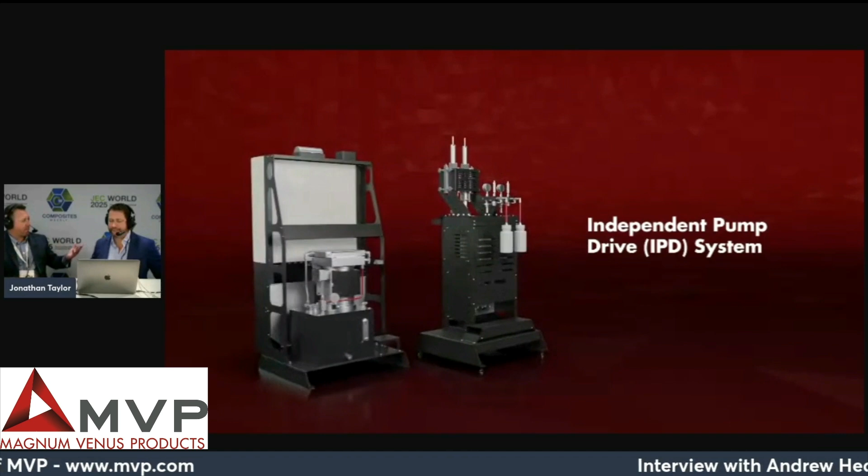And that's why we kind of rebranded them. It used to be called AED. We made it MVP Motion now, because everything that moves is going to be driven by PLC or motion axes to help develop or produce a new part. So that's from filament winding to robotics that we're going to be working with Lesta on, to even the independent drive system. As you see there, it's a PLC-driven system for precision and the data acquisition behind that and all that stuff too. So that is good.

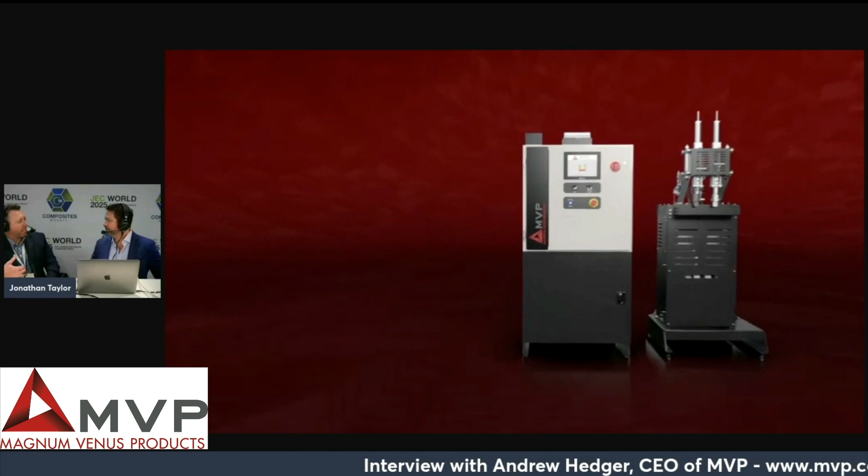Tell me a little more about this. So it became more material-based. A lot of people come to us, hey, can you pump these materials, the higher-end materials like your phenolics, your urethanes, your epoxies, stuff like that. And we're like, okay, we need a system that is almost pulseless.

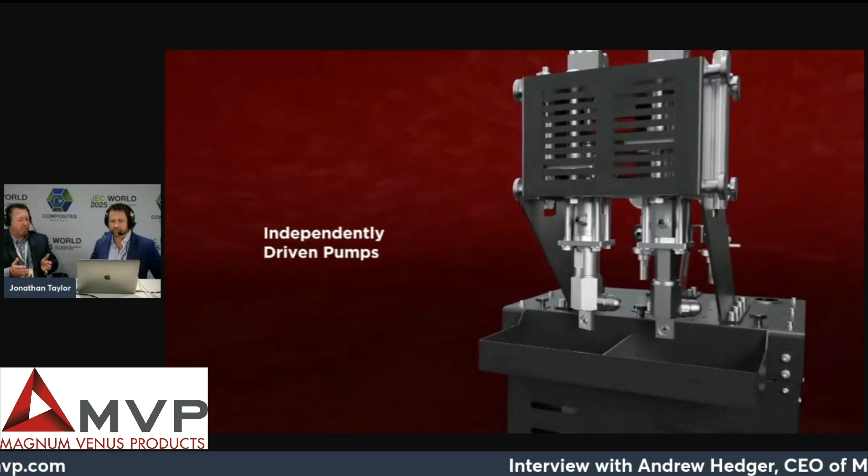So when I say pulseless, when you have an air-driven system, you'll get a variance to where, hey, every changeover, you'll see a little bit of cushion like that, right? So this thing is actually electrically driven, PLC operated. We have a little bit of air to it too, but it's all about precision of shot sizes.

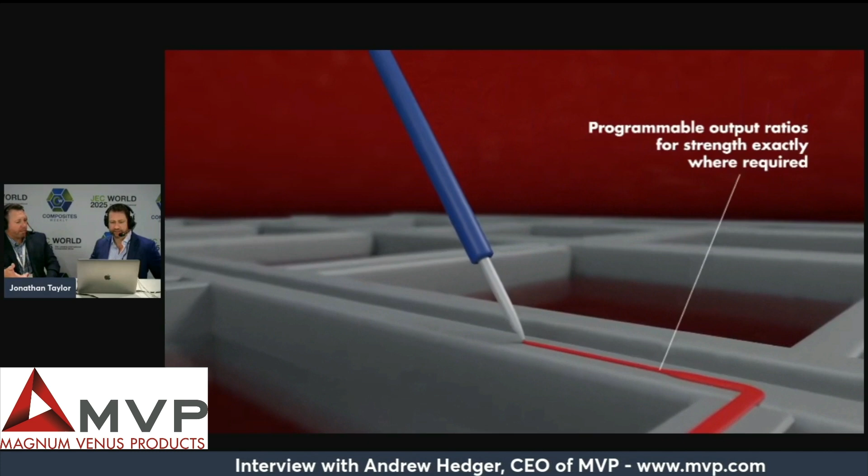Think about electrical components, stuff like that, potting, battery encapsulation. This is meant to do that, and it's meant to deliver exactly what shot size you need, what material you need, temperature, all that stuff. And all you got to do is basically hit a couple buttons and it runs away.

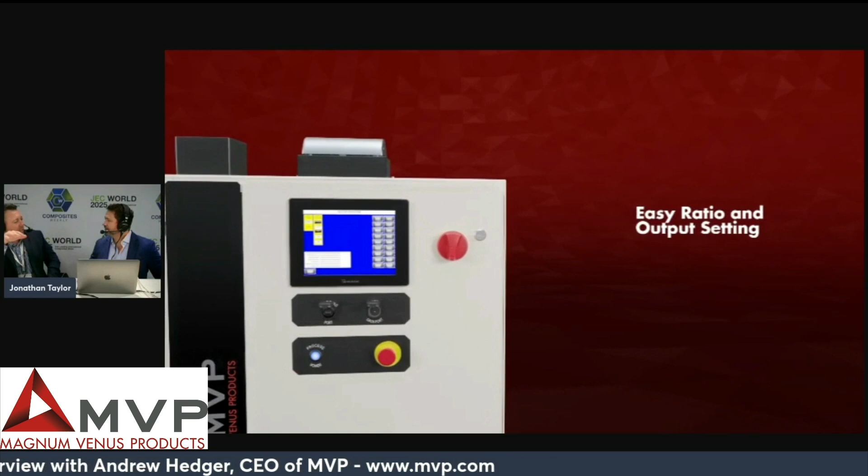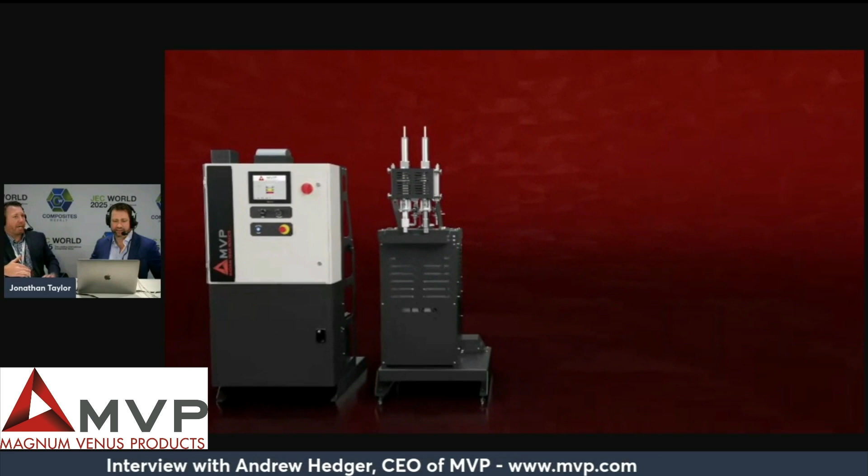But the thing that's cool is you'll see in that video in the background it shows 2 pumps. We have opportunities to go up to 6 different pumps on this machine and mix 6 different materials at once. So it could do 1 pump, 2 pumps, 3, 4, 5, 6, and the volumes could change dramatically too. So it's not only low volume and low dosage, it could be high volume, high dosage, and it could also be heated to the temperature you need.

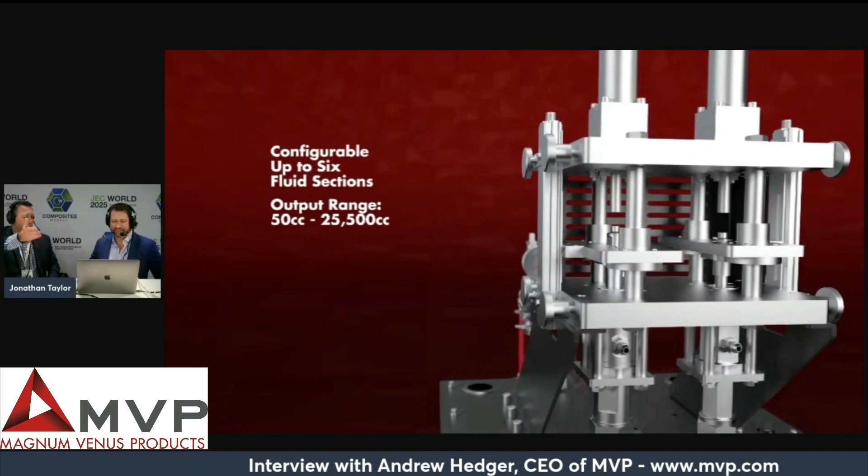It's pretty interesting because that's what we call independent drive. Every pump is being independently driven. So say you want this ratio, I want it to be 50 to 1. You can perfectly control that. So that is amazing, and this has been in the works.

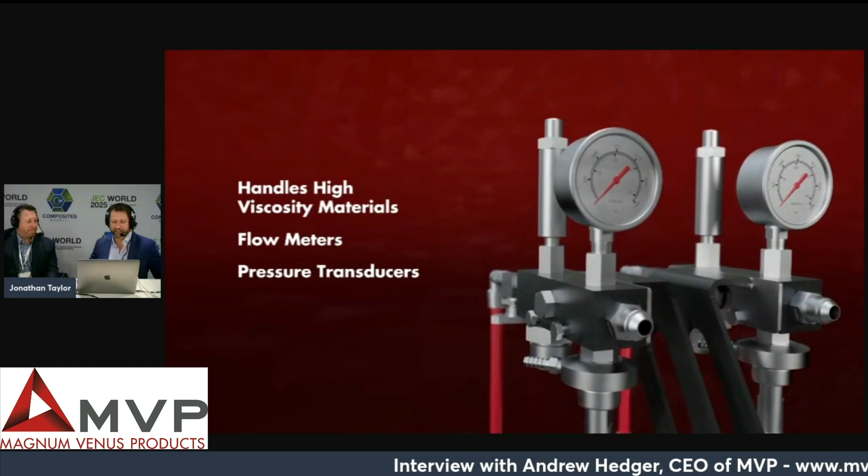I mean, you guys are just featuring this now. We've been working on developing it the last couple of years. We brought it to JEC last year as just a soft kind of launch. This year it's a full-blown launch.

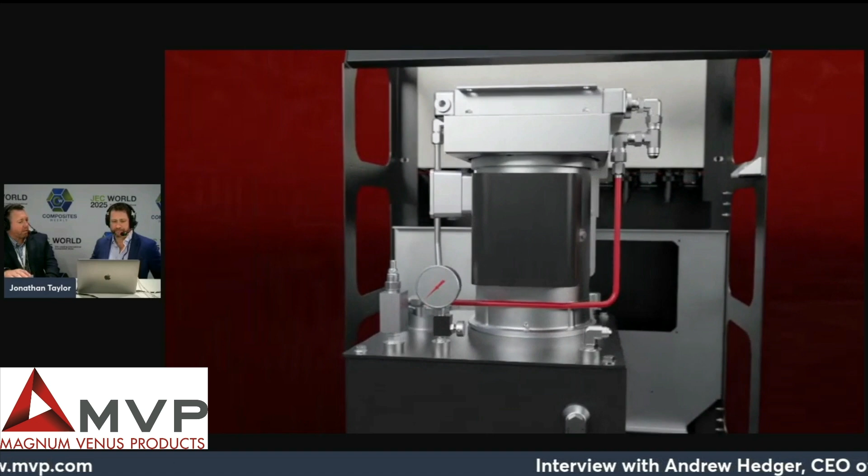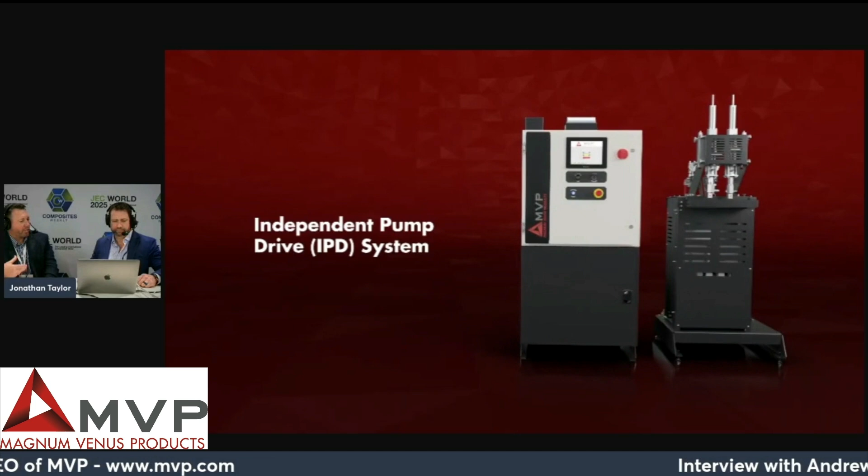We're actually going to be mixing runners through it later on today in our booth. But we have it dialed in now because we had to get some engineers on it, figure out the programming, understand the materials we want to actually deposit out of this machine. So it's been an official launch now, and it came at perfect timing because that's the first one we made in the gray and the red for the rebranding. We thought, this looks so cool, let's do it to the rest of our equipment now too.

So where are you field testing specifics? We're looking at a couple pultrusion companies right now, and a couple places in the aerospace industry. We have some customers there looking at doing some stuff. It's unique materials they're using. One's a phenolic resin we're messing around with, and the other, I can't really share the materials, but it's more of an epoxy-based system in the aerospace industry. They're testing them out in their labs, and we're getting great results on that.

That's great. We've had this actually connected to our 3D printer in the past, so it's a machine that will go on a 3D printer too, to deposit materials. So when you talk about thick stuff like peanut butter to really thin stuff, it pumps both, just depending on how you transfer feed into the pumps. From one end of the viscosity to the other, water or peanut butter, what do you want?

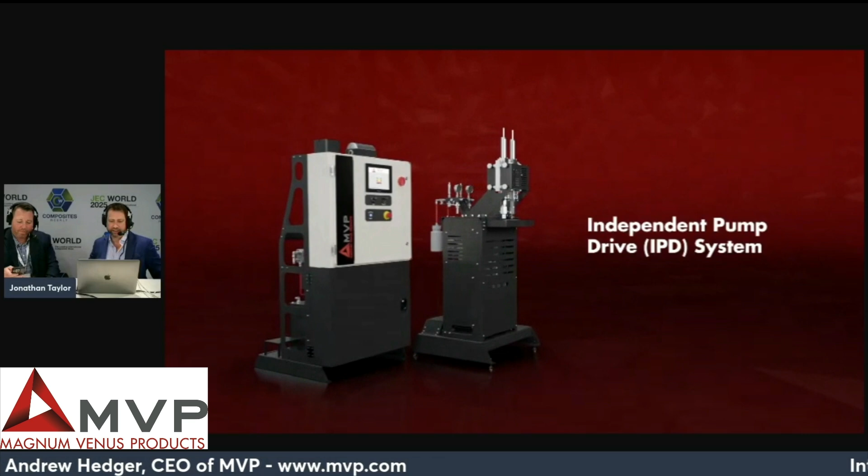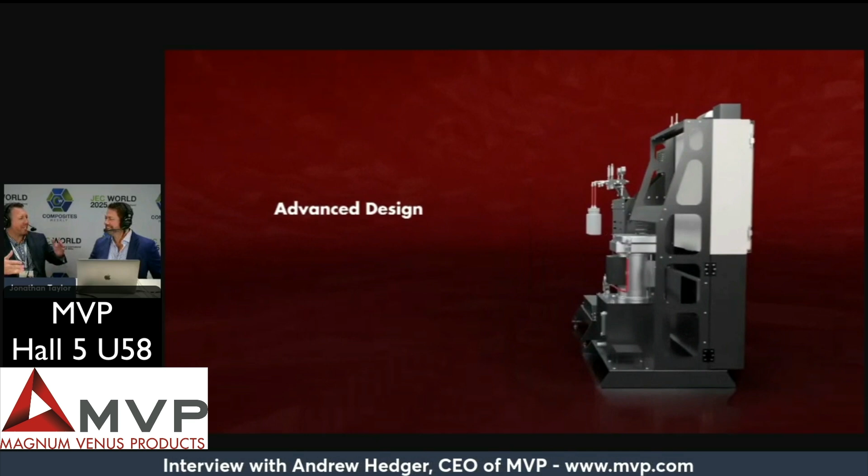Also, you told me you got a drink machine over there. Yeah, that's what the demo drives are going to be doing. So at 3 o'clock, we're going to be making runners, and it's going to show how you can do, hey, what ratios do you want, and being able to change them on the fly. So you guys will have a line of people at that booth. There'll be a limit, we need people to not block out the booth still.

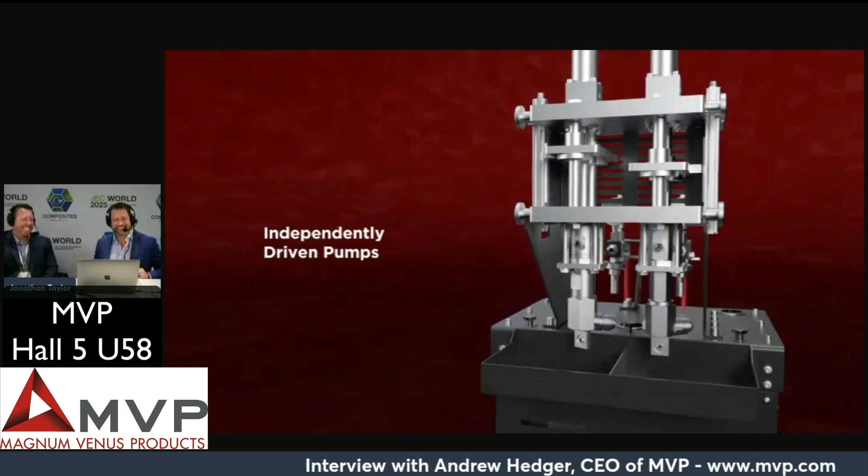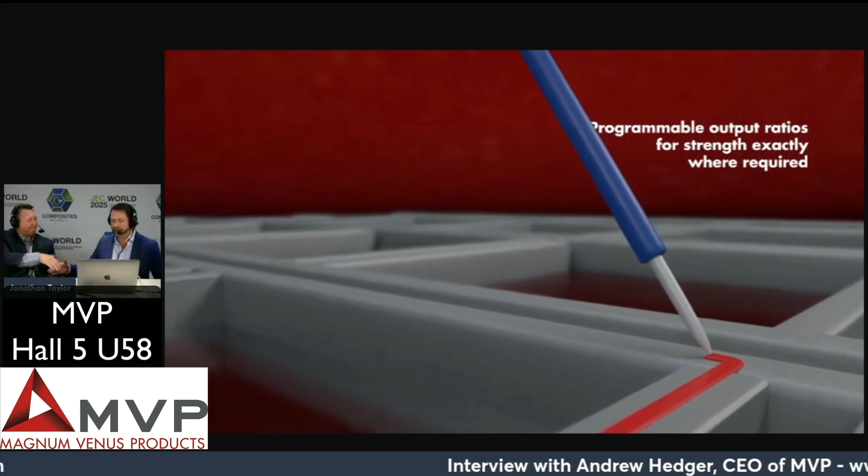All right guys, yeah, there's more applications to this. Okay, we need to move on, you've had your shot, okay. Exactly. No Andrew, it's always a pleasure man. Yeah, thanks for stopping by. Congratulations, appreciate it, and best of success on this new technology.

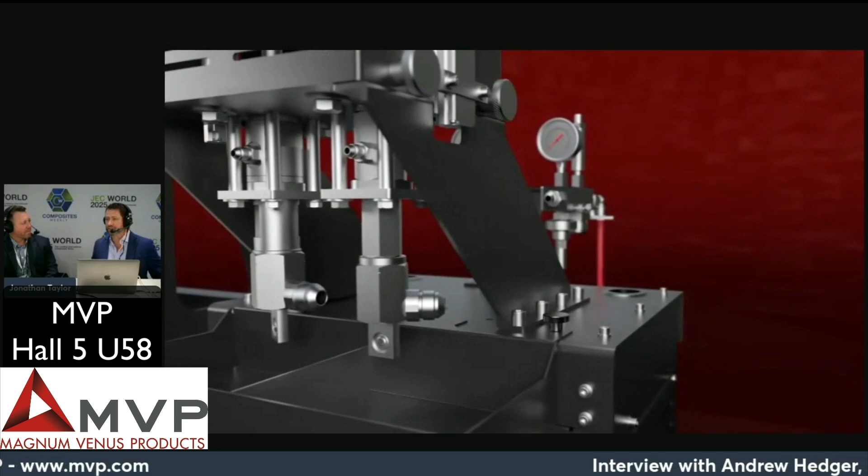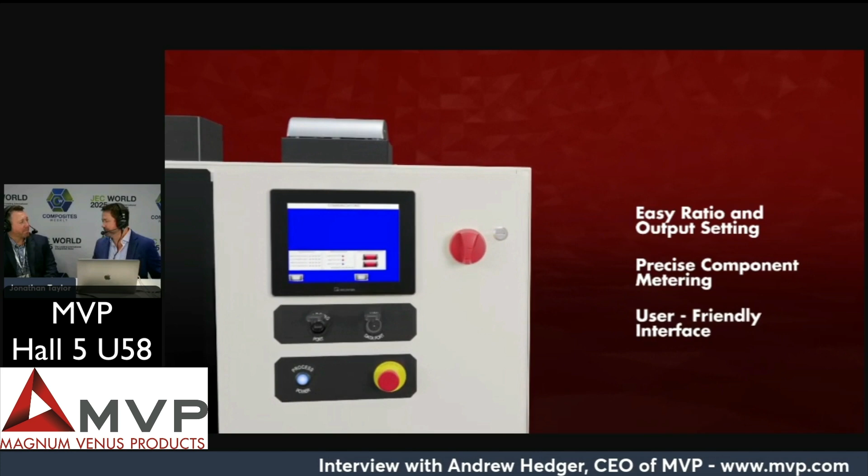And again, with Lesta too, talking with Derek, I think there's still a ton of interest out in the market now for, you look at finding skilled workers out there, and picking up a chopper gun, you just don't do it, you can't. It's hard to train somebody to pick it up and start doing it right away. And those people are just hard to find anymore. Skilled workers and reliable workers are hard to find.

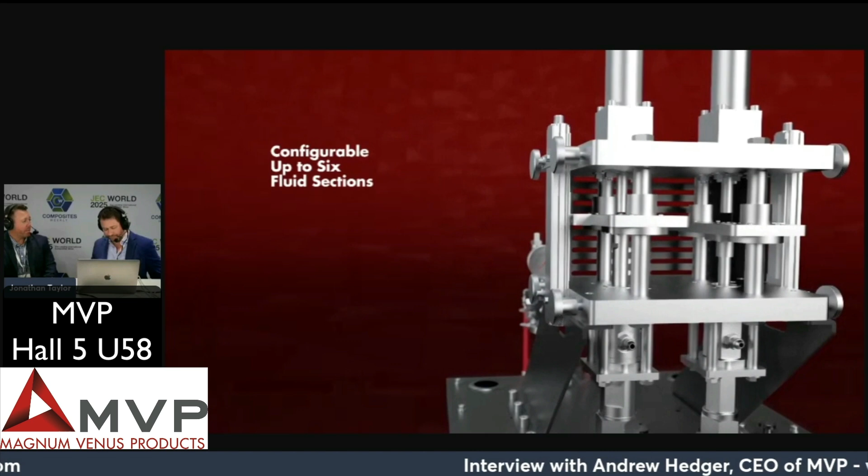Yeah, and we're getting a lot of demand for that too now on the Lesta robots. I mean, it's impressive what they do. A big thing is the gel coat. Yeah, and the millage, you need to be putting down the right millage. Otherwise you're going to get the alligatoring, you're going to get the cracking and all that stuff. That's right. Yeah, super cool. Yeah, thanks again man. I appreciate it, man. Yeah, good to see you as always. Absolutely.